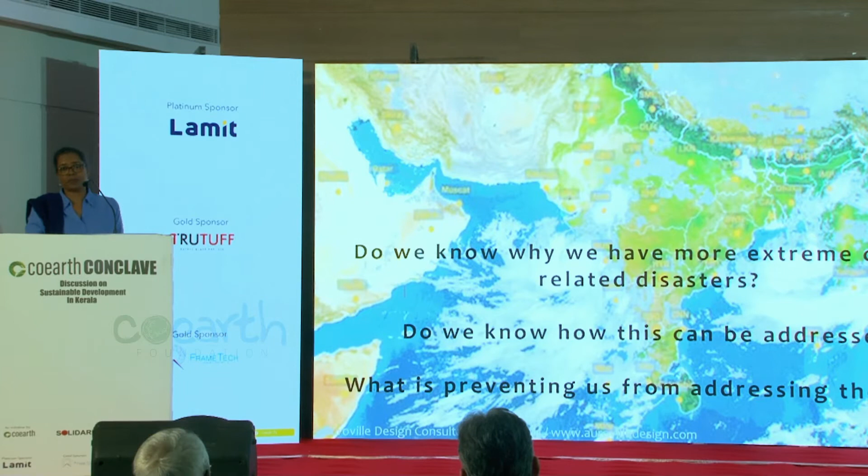So do we know why we have more extreme climate-related disasters? Of course, everybody in this room knows what is happening. We understand, we are aware, and we also know why we are not doing something about it. So it's not like it's a very complicated science. I mean, okay, some of the calculations and figures and statistics, but it's not complicated. We know the output, we know the process, we know the progression.

Do we know how this can be addressed? Somewhere we do know what can be done. And my question is, what is preventing us from addressing this issue?

So what I'm going to focus on basically is this: why do agencies involved in development make decisions that sabotage the long-term sustainability and the well-being of the collective? Why are we doing that? We know that it is not working. Finally, it comes back hitting us all, but we still continue to do it. What is compelling us to go down this road?

I'm going to just take a few of the players and look at what is happening in each of these players, because like Prashant said, and Mohan said, and Sandeep said, and K.T. Ravindran said, we are continuing to function in silos. Each department, each agency, each individual functions within a certain set of parameters, which they say, we are doing this. If there's a problem, it's not us. It is with the other. The problem is always with the other.

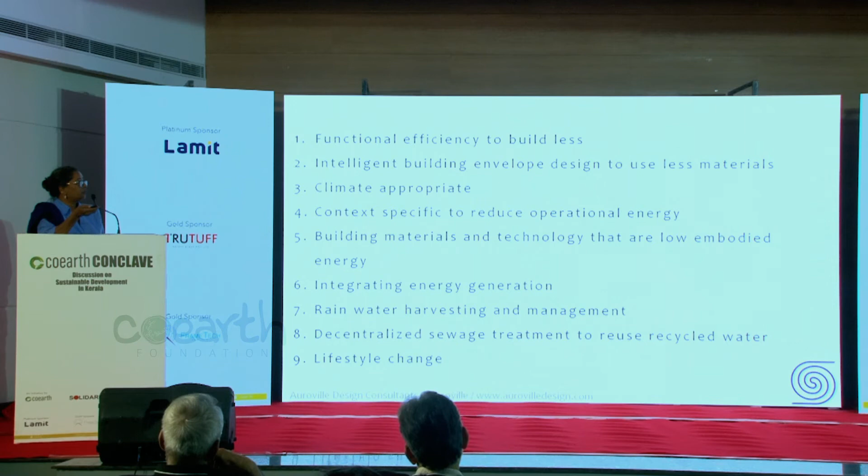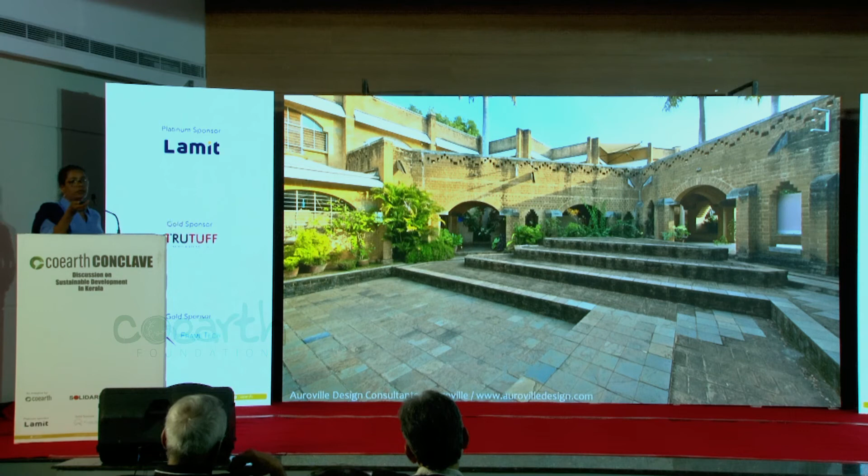Now I come to the last part where I'll show you some of the projects we have done, going through them quickly. This is the visitor center, about 33 years old, done with compressed blocks. The flooring in this amphitheater is done with compressed blocks and has been there for 33 years. This building sees traffic of almost a minimum of 2,000 people a day, since it's the visitor center of Auroville, and they walk over it with shoes.

When we continue to pave pedestrian areas with hard, high embodied energy materials under the excuse that it's more durable, I think we're telling ourselves stories. It's not tested, it's not proven. But by repeating it ad infinitum, it becomes accepted as truth. Unfortunately, truth is not decided by majority vote.

Again, we use as much as possible non-processed materials. These are kadapa slabs used in staircases, compressed blocks with compression structures for openings and roofing. This is a school where we did the tile roof, which is appropriate to our climate, but as timber is not available on the East Coast, this is a tensile structure using prefabricated RCC beams.

The solar kitchen, again in compressed blocks with foundation in compressed earth. The cooking happens here using a solar thermal device, a hemispheric bowl with about 11,000 mirrors, and we cook for about 1,000 people at mealtime. It produces almost 750 cubic meters of steam an hour.

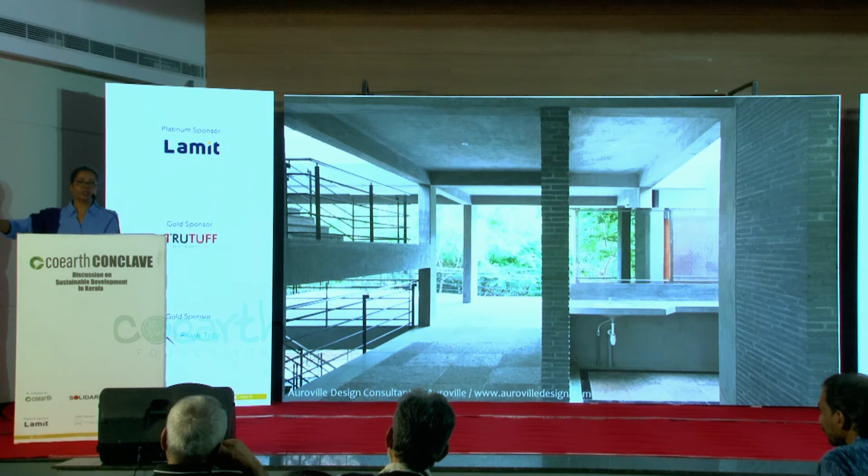So now we started doing walls with it, and they're quite good. They're easy to work, and you don't need to paint or plaster. They take the rain, so we mix it with rammed earth. The base part, exposed to rain or high traffic with people putting their hands on it, gets grime. So when you put it in the lower part and people keep moving their hands, it actually gets a nice patina, instead of looking patchy like whitewashed or textured walls.

Most of the wood in our buildings is recycled. I'm sorry to say, but it's recycled from nice old houses of Pondicherry, because the FSI was increased. They take down the nice houses to build ground plus 3, ground plus 4. The Madras roof beams are excellent wood.

Now I'm coming to the last part. I want to take the next step to say that all this doesn't need to be exotic. It actually works. I'm going to take one of our projects - this is a housing cluster that we did. We'll go through all the walls.

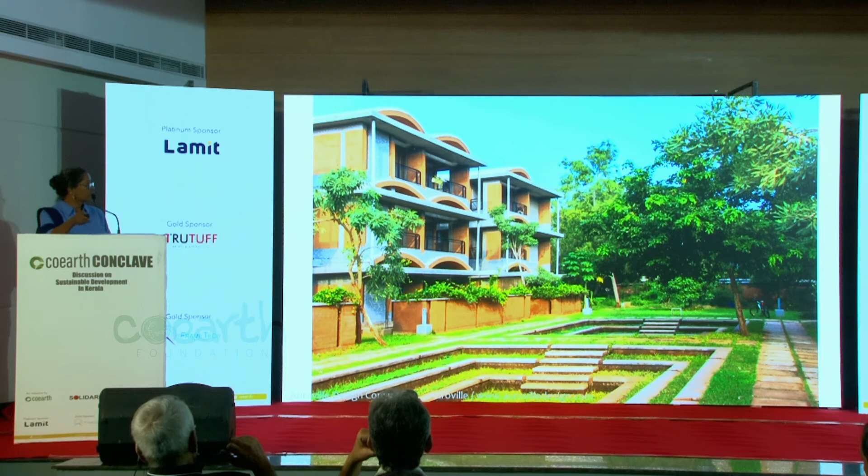The walls of the building are done with a technique called poured earth concrete. It's a mix of earth, different gradings of construction rubble - so we're reusing construction and demolition waste - with some sand and cement. The sand is actually M sand, the fine granite gravel. It's mixed in a concrete mixer, poured between forms like you'd do with concrete, and vibrated. After 3 hours, you remove the shuttering and your wall is ready.

In the beginning we were doing compressed earth blocks, then we moved to rammed earth, because between compressed earth blocks and construction, especially on tight urban sites or with a timeline to meet - you dig the soil, sieve it, make the bricks, keep them for 3 weeks, then use them. Not only is the process long, you also use a lot of space. So we moved to rammed earth, where you just excavate the soil - usually where you're making the rainwater harvesting bioswale or decentralized sewage plant - and ram it, and your walls are made. So the process went from 6 steps down to 3 steps.

But then we realized one of the issues with rammed earth is it still requires a lot more supervision, because for some reason in this country, we've decided we're not intelligent enough - that people won't pay attention when they learn something, and won't pay attention to actually do it the correct way.

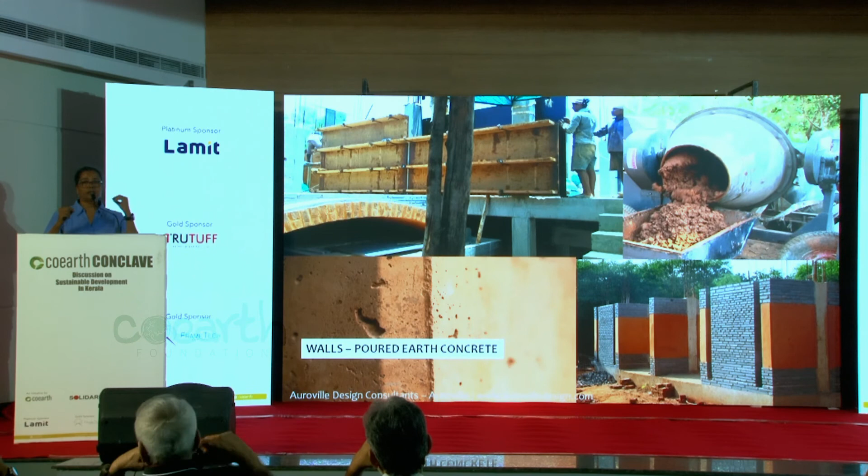I have clients who don't want to pay 35 or 40,000 rupees to have a young, well-trained site supervisor from the local area with enough skill, but instead employ a passed-out civil engineer from one of the local private colleges who just stands around in his white shirt and white pant, because in Tamil Nadu they like to wear white, and he knows nothing.

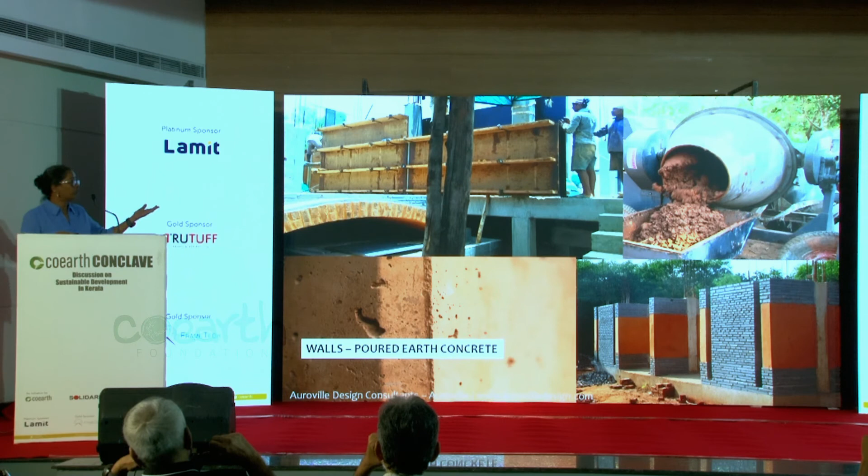So we said, okay, let's simplify it further with the same material. One advantage is we can use construction demolition waste, which is quite easily available in urban areas. In our area it's more difficult to get, but in urban areas there's a lot of construction demolition waste. And this is the kind of walls you get.

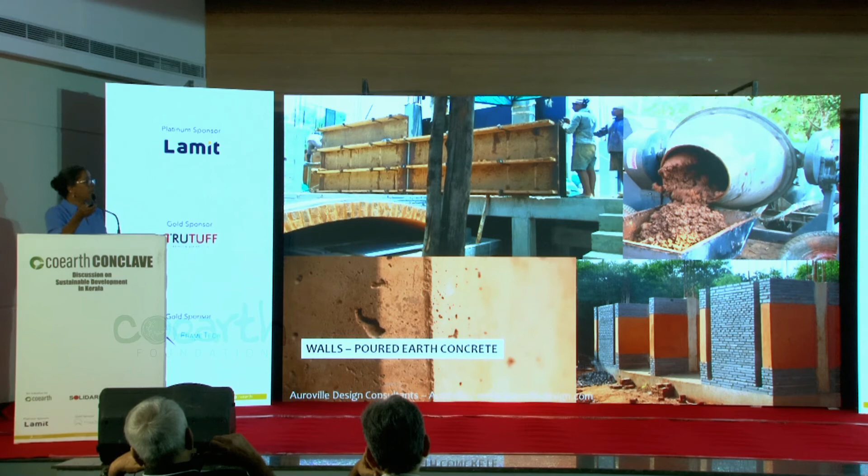So you have a set of shuttering. With one set of shuttering, you can build walls 8 feet high, 10 feet high, and do 14 to 15 feet in length in one go.

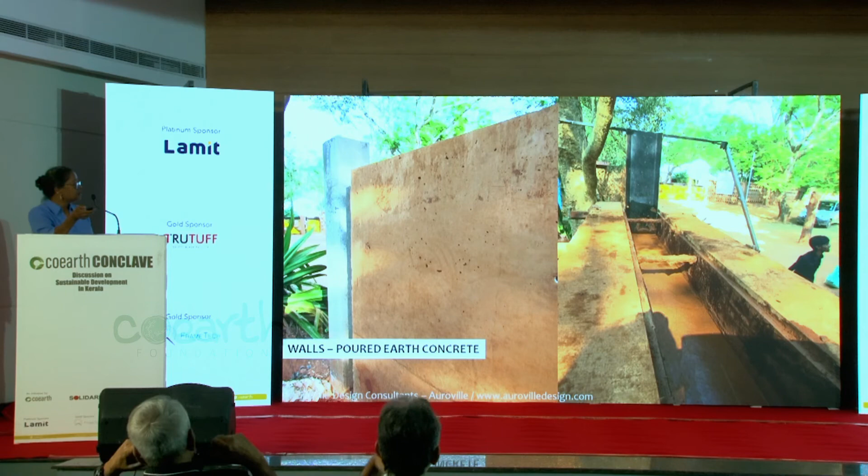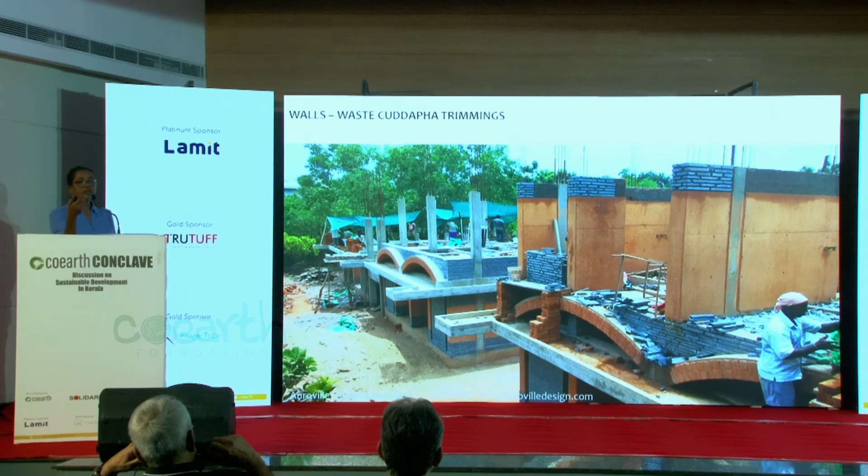The next thing is, wherever the wall meets the floor or the wall meets the ground, instead of using earth, we now use waste Cuddapha strips, because they are more impervious, need less maintenance, and also give a nice texture. So it's a combination between earth and Cuddapha stone.

All the roofing in this housing is made with segmental arches. As you've seen, it's ground plus 3 floors, and each floor is built over segmental arches constructed in a series that forms a vault.

Here we use the local fired bricks because of the acoustic issue. The local fired brick in our area, since we have a sandy, about 60% granular, pre-lateritic soil, is burned at low temperature because there's no timber or coal to burn. So you get something almost like a biscuit rather than a proper brick, with nearly 10% wastage just in transport. These bricks have very poor edges and poor compressive strength, but when used for sound dampening and ceilings, they're very nice because they break up the sound quite well.

And in the end, when it's finished, we just do the pointing with stabilizer plaster.

Over and above these segmental arch vaulted roofs, we build partition walls and fill them with shredded thermocol. Pondicherry has a huge number of assembling industries, and of course in Auroville many of us use Amazon and Flipkart, so a lot of thermocol builds up from packing and industry. This is collected in one central place in Auroville, which we call the Eco Service.

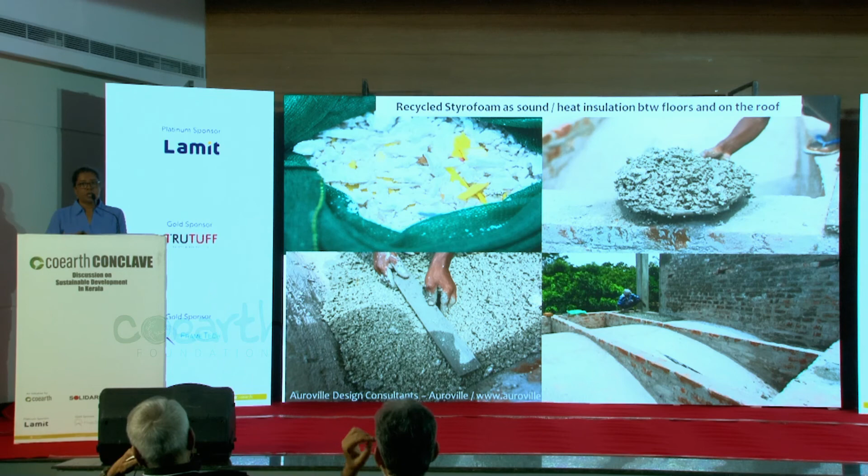We're lucky to have a very finicky, micromanaging Swiss fellow who built a shredding machine that we can regulate into 3 or 4 different sizes of shredding. Using this machine, depending on the use, we apply it as underfloor filling, above the roof for insulation, within the walls, and also in the backfill, since we're using soil from the foundation for part of the backfill too. For some reason, the termites don't like it much.

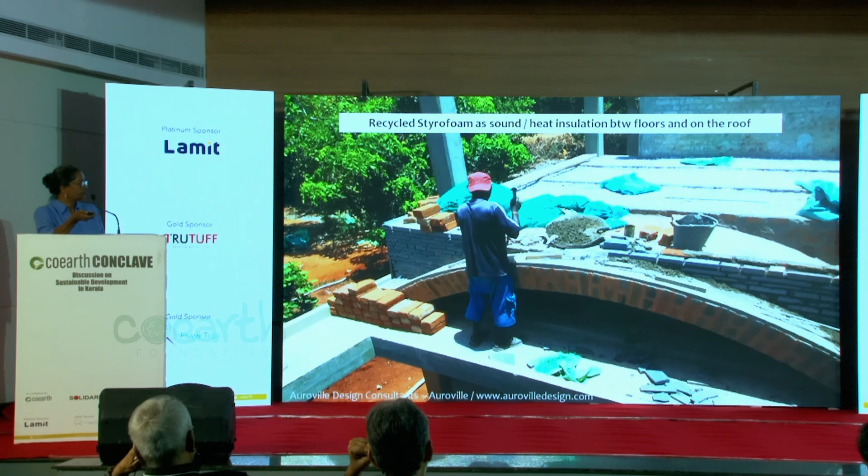So this is what happens after it's filled over, and then we start the next floor. At the end of the day, you have several floors built with segmental arches and thermocol as floor filling.

All the roof water is collected in the central spaces, and all the surface water is collected in a bioswale. That part of the experiment is still ongoing because our funding fell through. We would like to have swales around this project to collect surface runoff and feed secondary wells, so that at least 30 to 35% of the potable water needs of this settlement come from rainwater. Our problem is that rain falls only within 6 to 8 weeks of the year, during October-November, with a little more in the rain shadow of the summer monsoon.

So we cannot simply build rainwater harvesting structures, because then we'd be storing water for only 2 to 3 months, and afterwards these structures, which are costly since they have to be built in concrete, would sit empty.

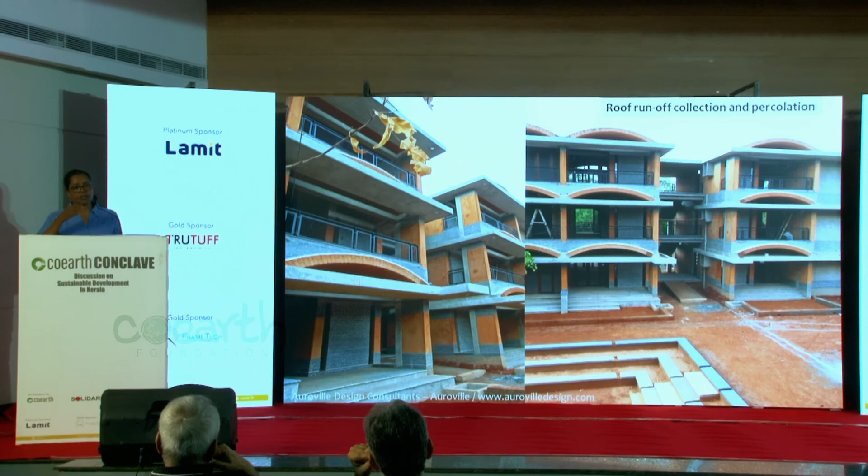One of the ways we found is that instead of having roof runoff held in underground water tanks, we look at a larger level in terms of development, making sure our roads and the runoff from them are done in such a way with the topography that the non-road, non-vehicle parts can be segregated, collected in bioswales, and then have secondary wells to use for pumping potable water.

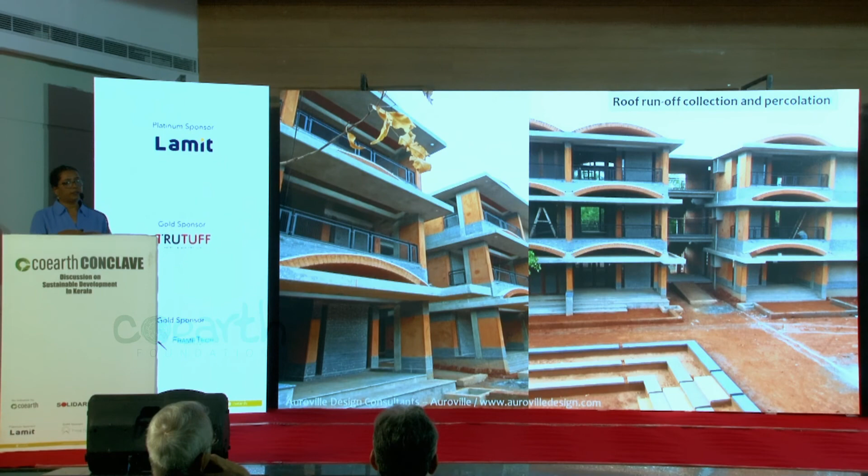The idea of recharging the groundwater table, which is what we worked with for 40 years, doesn't work because the electrical subsidy allows the farmer to pump indefinitely, so the input going in is nothing compared to the output. But after undertaking a study, we realized the farmer was an easy whipping boy, when actually the main water use is all the urban development in and around Pondicherry on the rice fields, using much more water than the farmers ever used when it was just rice fields.

The internal finishes are very simple: IPS and stone flooring, recycled wood for all the openings, and particle boards made from industrial waste for all the cupboards. So this is how it looks.

We have part of the roof with solar panels, and we are net positive in terms of energy generation. It's a little cluster of 54 people who moved in August 2018, so it's a little more than a year, and till today we are net positive — we haven't had to pay for electricity yet. This is how it is, and we're going on with the next phases.

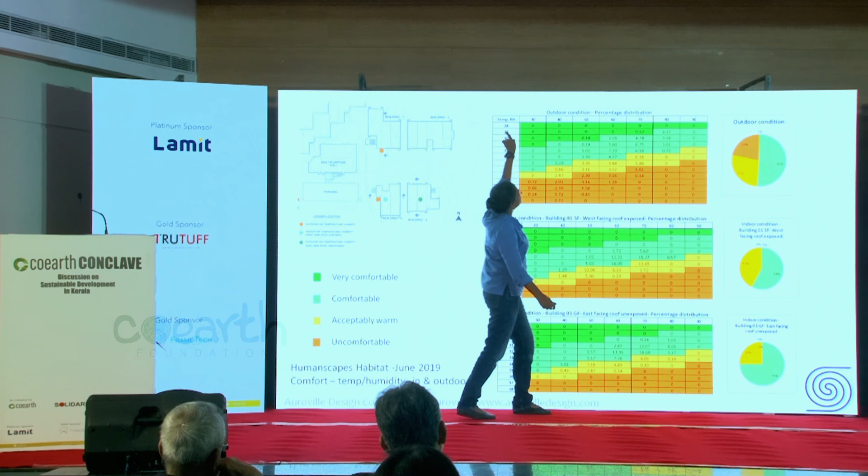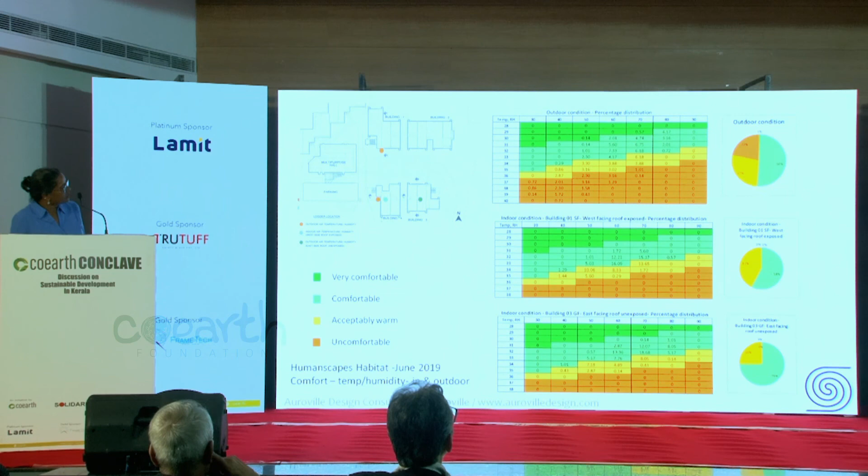Comfort is a correlation between temperature and humidity, and each number indicates the hours in that month within that temperature and humidity range. To make life easier for the audience, we put it in a pie chart. I can't read it from here, but we have about 23% of the month, usually in the peak afternoon, where the outdoor temperature and heat island effect were uncomfortable.

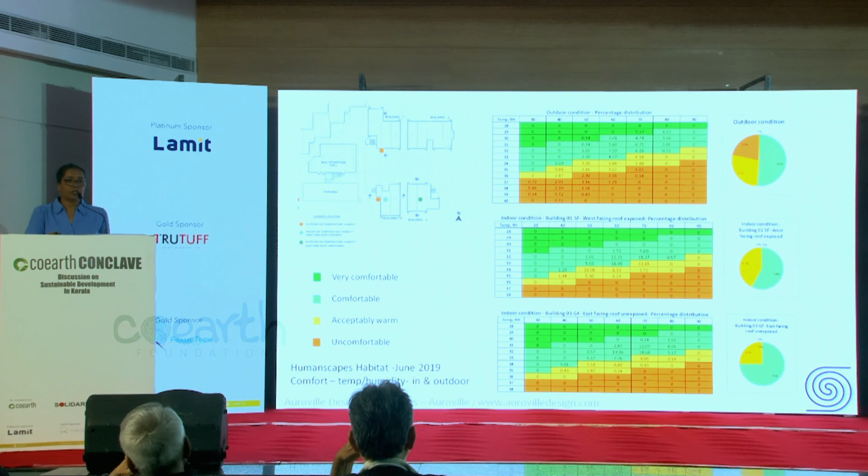But by evening, when we looked at it, the temperature had dropped. One of our main aims was to make sure that the orientation of buildings, the type of building materials, the shape of the building, and the landscape are all correlated, so that when the sun sets, you need minimal time to cool not just the inside of the buildings but also around them. This is a major problem most of us don't realize — more and more people need air conditioning because of the urban heat island effect. Outside is hot, so you're not going to open your windows at 7 in the evening.

To get involved, I think first of all, all of us have to develop the mindset of an activist. Otherwise, the environment is nobody's baby, but somebody's expertise. When it's just someone's expertise, that person will be marketing his expertise and not getting things done on the ground, nor will it transfer to people. So I think the first thing is to make that attitudinal change in ourselves, to believe that if you want to change something, you have to...